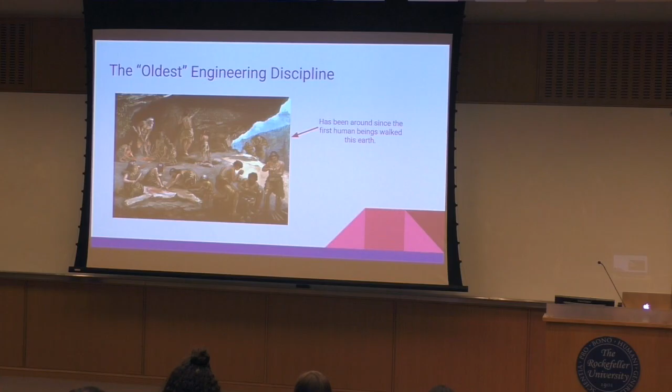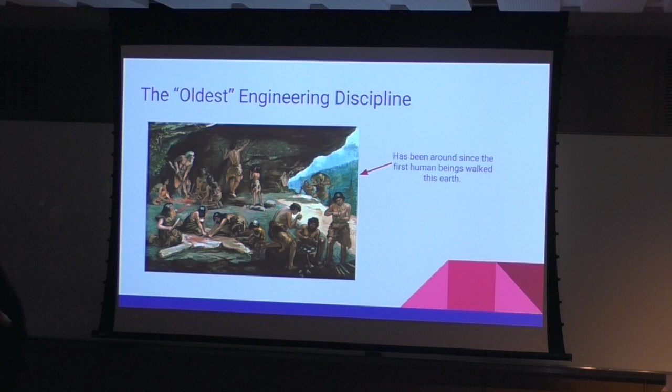Raise your hand if you've heard of civil engineering before. I think we got a little bit of us. So I'm going to go into the history behind what civil engineering is. Civil engineering is the oldest engineering discipline. It's been around since the first human beings walked the earth, since they first put up a stable structure or maybe pushed a log over a river - any man-made object that allows us to exist within the physical and built environment. Civil engineering is a discipline that deals with the design, construction, and maintenance of the physically and naturally built environment.

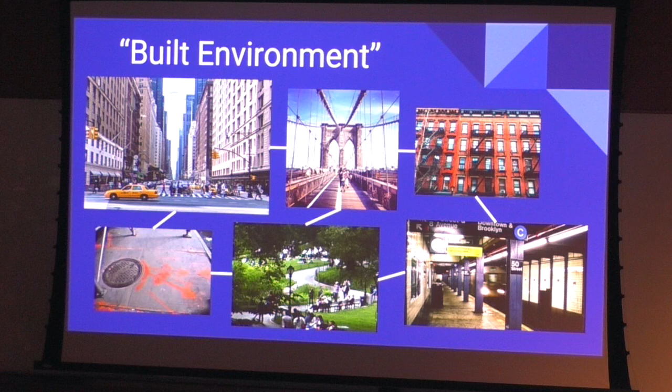And by built environment, I mean all of this - pretty much your buildings, your roads, your sidewalks, curbs, bridges, all of your underground utilities, the paths through the parks that we have, the subway stations. So you can basically call New York City one giant built environment. I'm going to go through some of the different types of civil engineering right now - there are different subtypes.

These are just some of them. But we've got structural engineering, which deals with buildings, bridges, tunnels, anything where you're looking at how to support the weight in this structure and make sure that it doesn't fall down.

Then you've got transportation engineering, which deals with the flow of vehicles and people. So that's like the signal controls within the subway system, or the traffic signal timing in the city to allow traffic to flow well.

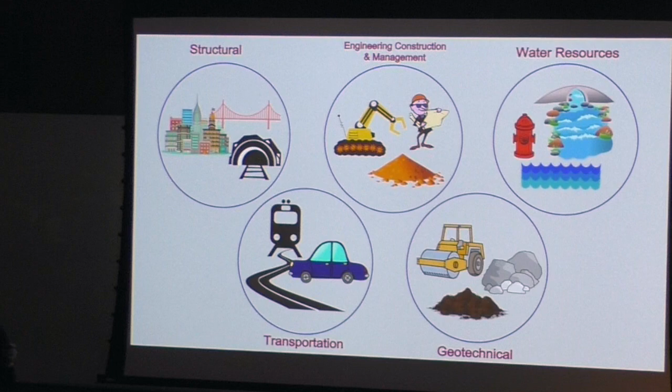That's all transportation. We have engineering, construction, and management, which is kind of what I do. This is taking the designs that people make and practically implementing that outside. I work directly with construction workers, I don't do the construction work, I just oversee what they're doing. That's the management side of it.

Then you've got geotechnical engineering, which is like your foundations - what soil do we have underneath what we're building? It's important because you could have soil that isn't good or has too much water infiltration, and you put a building on top of it and it sinks into the ground, kind of like the Leaning Tower of Pisa. That's kind of what happened with that. So geotechnical is all the materials below that provide a good solid foundation for your buildings or different structures.

And then you've got water resources - where's our water coming from? Where is the water that we're getting to cook or clean ourselves or different things like that? And then what are we putting out back into the environment - the wastewater, how we're treating that, and how that's going to be environmentally friendly. So these are all different subtypes of civil engineering, involved in infrastructure work within the city.

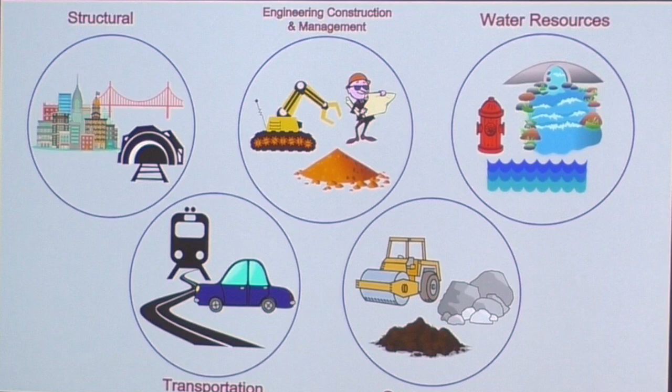So if you know how, when you're sick, you go to a doctor to get a diagnosis and a cure - I would consider civil engineers to be the doctors of infrastructure. If there's any issue with a building or a bridge or something's not functioning quite right, we go in, we diagnose what the issue is, and then we provide a cure for that.

So I'm going to go into the history of how the city was formed. The first settlers, the Dutch settlers, came to the island of Manhattan in 1609. They chose this location specifically for its proximity to the East River and mostly the Hudson River, because that went all the way north into the mainland and connected to valuable trading assets.

One of the largest changes, the most drastic, were actually the expanding borders of Lower Manhattan. This is the first known map we have of the city. They've got this fortified wall, which is where Wall Street was named after. So that's Wall Street, and this is like a military outpost - it was actually a fur trading post. Anything north of this is pretty much unoccupied land in the 1600s.

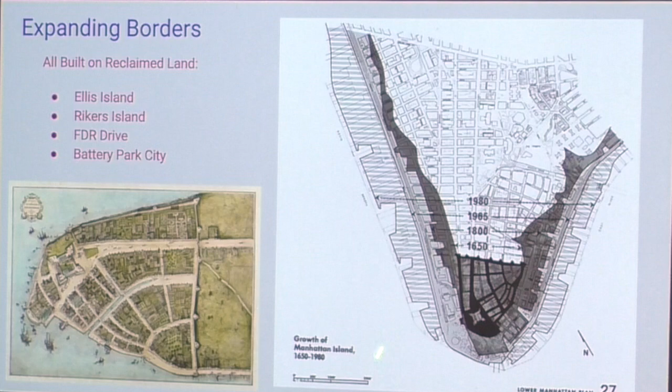And Battery Park City, they actually built that from all of the dirt that they excavated out from the World Trade Center site. They just excavated it, moved it down, and built Battery Park City. So this is one of the most drastic changes.

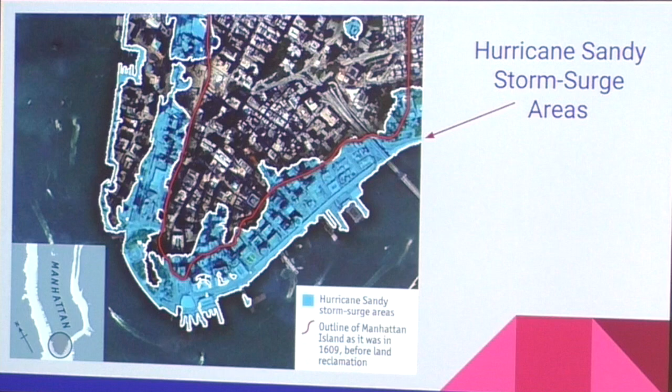I thought this was pretty interesting. The outline of Manhattan Island as it was in 1609 is this red line, and then when Hurricane Sandy came through, this is the storm surge area. You can kind of see how it goes pretty much up until that original outline of the island. So I'm thinking, if we hadn't reclaimed all of this land, would it have flooded as bad as it did? You can't really know, but it's interesting to think about.

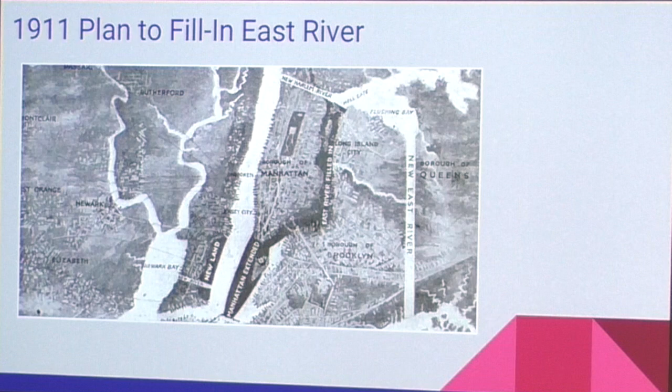At this point, they were expanding a lot in manufacturing jobs, which means they needed a lot more land space. They weren't building up, they were building out. But once manufacturing started going down in the early 1900s, they actually started building upward, because people could just work in office buildings and generate money through that. So they didn't need the extra land, and that's kind of why they scrapped this plan.

The original water sourcing on the island, they were all finite sources of water, like the water table below ground. They would use small streams, ponds, stuff like that. They had this thing called the Collect Pond, which is kind of in the Chinatown and Five Points area, that's where this was, and that's where a lot of people got their water at that point. Obviously they can't get it from the ocean because it's salt water.

One of the catalysts for this was actually the prevalence of fires in the 1800s. They wanted to develop a waterworks system, a comprehensive, reliable, clean drinking distribution system. They had a lot of fires happening because the population grew, you had a lot more wooden buildings close together, and the firefighters couldn't get the water to where they needed it to be. They didn't have a hydrant system or anything like that. I feel like we take that for granted, but they didn't have a system underground providing them with water, so they'd have to use bucket lines, stuff like that. So to prevent any further large fires, they wanted to set up this waterworks system.

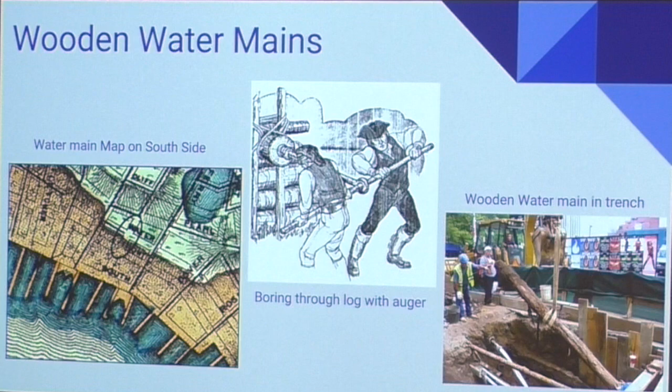There were some other flaws with this. So like the wooden water mains, this is one being removed from a trench. You can still find them once in a while in lower Manhattan, I think this is the South Street Seaport. One of the downsides was that they were susceptible to tree root infiltration, so trees would grow above them and the roots would go into the logs, but they would also freeze in the winter. It just wasn't a reliable source because they were still using the finite water sources from the Collect Pond and different areas like that.

But this drastically changed how people could live, the quality of people's lives at that time, because they were able to have consistent clean water sources. They had bathhouses open to the public. Disease was going down because they didn't have to use the polluted water anymore, stuff like that. So it was really beneficial to the city.

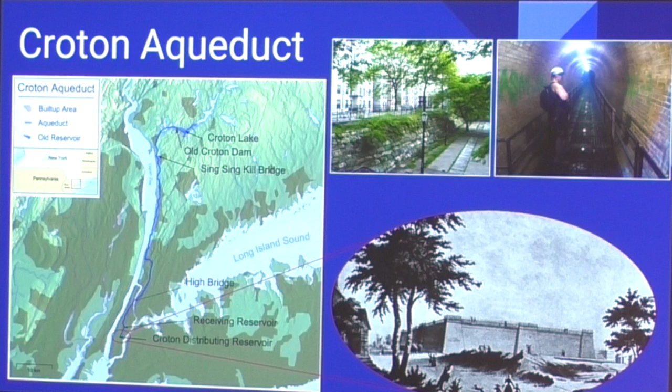But this is the first aqueduct system they set up. They rebuilt a newer, larger one in 1890, I believe. And then this is the current New York City water supply system. So this is the Croton watershed, that's kind of what I was talking about before. And then they've expanded all the way up here to the Catskill, Delaware watersheds.

So the New York City water system is considered kind of the gold standard of urban water supply systems in the world. We have some of the best water and the largest system ever made.

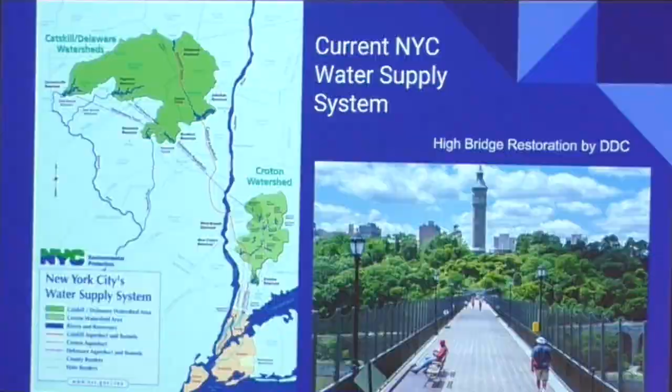Here's the High Bridge restoration by DDC. That was, where was that, over here? No, yeah, right there. Anyway, so the water comes from, they put in a few more aqueducts over here, comes all the way down. Again, this is all gravity flow. And it goes to what's called the Cat-Del UV plant, named after the Catskill, Delaware watersheds.

Here, because the water is unfiltered coming into this, they have to make sure they're getting all the contaminants out. They used to put a lot of chlorine into the water. They found out that will disinfect it, but it's also not great for people to ingest that much chlorine. So they found this technology in the late 90s where you could basically treat different toxins with UV light in the water, like cryptosporidium, which was one they were trying to deal with. Basically you treat it with UV light and that gets rid of it, so they can put less chlorine into the water. It actually saved them a lot of money doing this versus building a giant water filtration plant.

So they put a lot of money into this, but it has saved a lot over time.

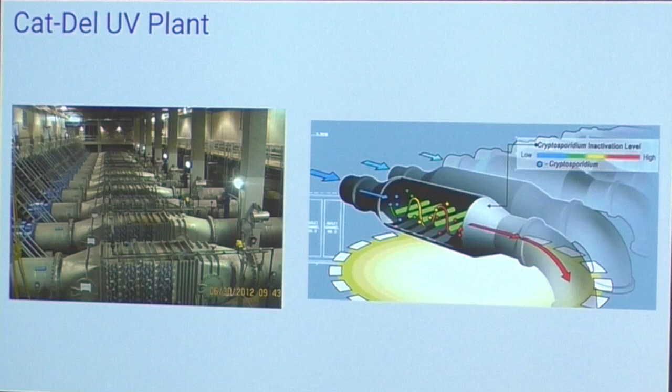After it goes to the Cat-Del UV plant, we're going to go down into these water tunnels. We've got 3 of them now. The first 2 were built in the early 1900s, and the third one was just opened in 2013. It had been under construction since the 1970s. That's a very long time.

And these are built, they're huge tunnels, as you can see. They're built really deep in the ground, probably like 800 feet down. And it's all gravity flow.

So it comes out of the Cat-Del UV plant, it goes into these tunnels, and the pressure of the water is so large that they have these shafts going up to the surface that it'll just shoot up these shafts, and then it'll go into this trunk water main system, which is like, they're probably 3 to 5 feet in diameter, larger pipes going throughout the city. And then you go into a distribution water main system.

So that would be stuff that we replace on a regular basis, like 1-foot ductile iron pipes. And those are going down every single street in the city. Usually you'll have like 2 lines on an avenue and just 1 on a regular street, and then you've got house connections going to each building from there.

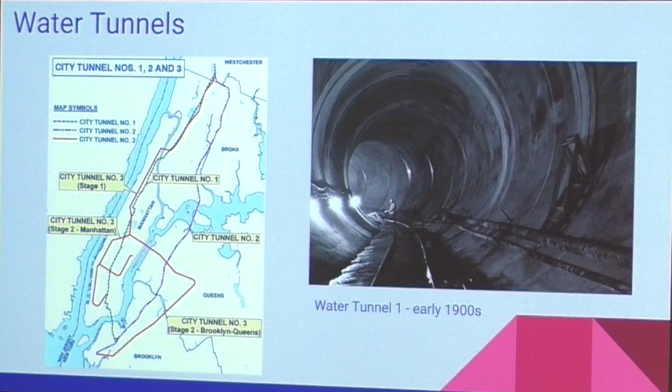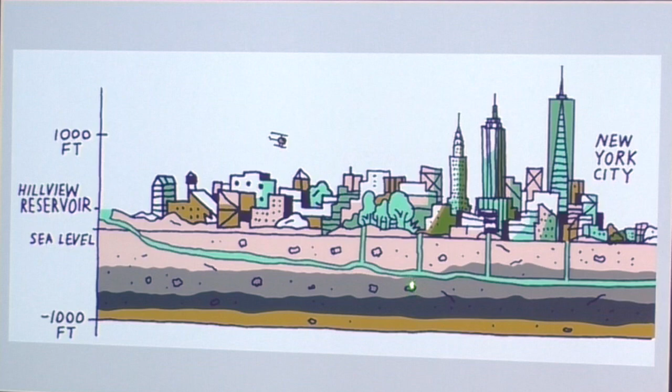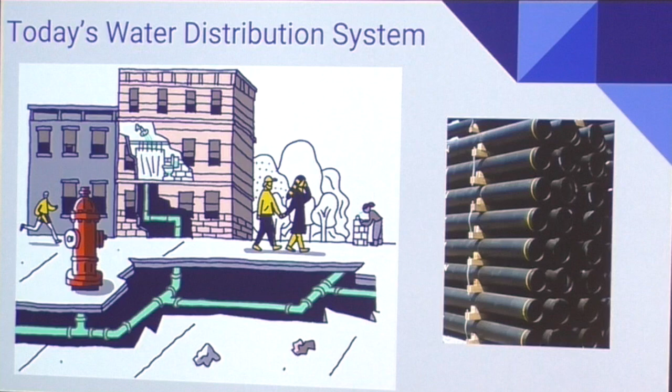The pipes they used to use, we've actually advanced our technology enough to the point where, well, they used to use cast iron, and they used lead joints or lead service lines and stuff like that. Lead obviously is toxic to people, so we don't want to use that. And cast iron gets really brittle over time, so they would break a lot. So we've been putting in these other pipes, ductile iron pipes, so hopefully that'll last a lot longer. That's a lot of what DDC does, though, is water distribution replacement.

I mentioned the sewers before, so this is when people stopped taking water from the existing water table, and it started rising again and flooding everyone's basements. So they set up this system of sewers. There's a few different types. I'm sure you've seen this.

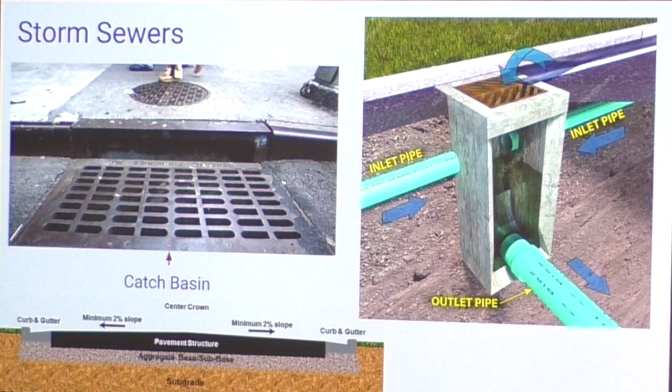That's purposefully done, obviously, because you don't want water pooling in the middle of your street. So they do this, and then it'll go into wherever the lowest point of the road is. It'll go into this catch basin, and then into an outlet pipe, into a larger system, and then into a wastewater treatment plant. So that's a storm sewer.

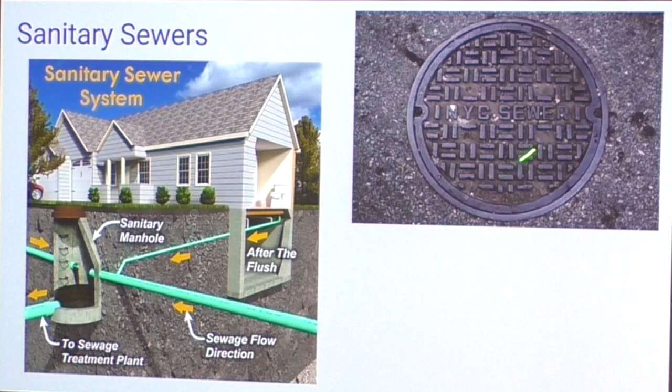Anyways, the systems here, they originally had all of that water running together. So they had your rainwater and then your wastewater from your house running through the same pipe. They figured out later that it was actually more convenient and efficient to separate them into separate lines. But the city built them so long ago that we just replace what's already in the ground because there's too much stuff running. I'll show you a picture later. It's so crowded whenever you try to dig into the ground. So we just replace what's existing, so they're combined right now.

In the rest of the country, because it was built a lot later, like where I'm from, the sewers are all separated, because they had come up with that technology at that point.

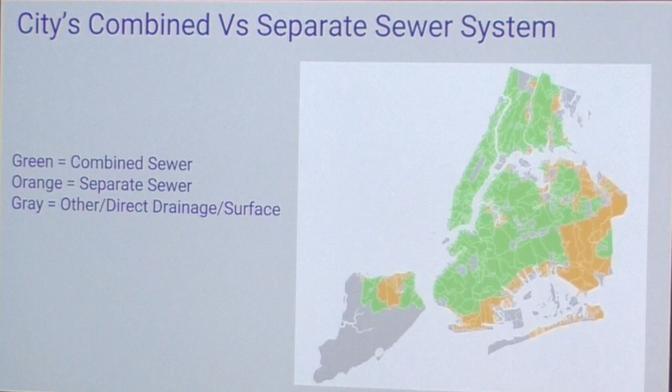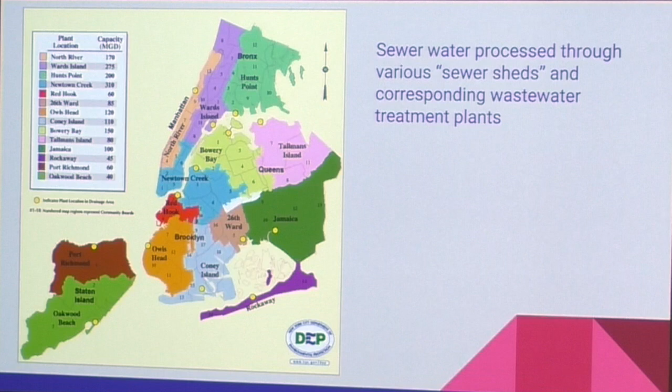So then the sewer water is processed through the various sewer sheds and to the corresponding wastewater treatment plants. You can kind of find where you live and what treatment plant is treating your water. I think the Newtown Creek and Greenpoint plant actually services the most in this area. They'll take the water in, run it through a series of filters that break down the waste, get the clean water out again, and release that into the oceans, streams, and so on. That's kind of how the sewer system works.

Waste reduction and sanitation—we know about this because if you go out in the summer, it smells awful, right? All the garbage is on the curb.

The original systems, I think, were much worse from what I hear. People would throw garbage out their windows onto the street, or dump it in the harbor. I actually found that they had a system of trash-eating pigs—a bunch of pigs that would run around the city eating the garbage. They didn't have as many plastics back then, so the pigs could eat most of it. Eventually they decided it was unsanitary and got the pigs out of the city, then hired a bunch of people instead.

They called them the White Wings. They were all dressed in white because they wanted to emphasize cleanliness and sanitation, and they were kind of the street sweepers, getting all the trash out of the streets. That was the first comprehensive sanitation system in the city.

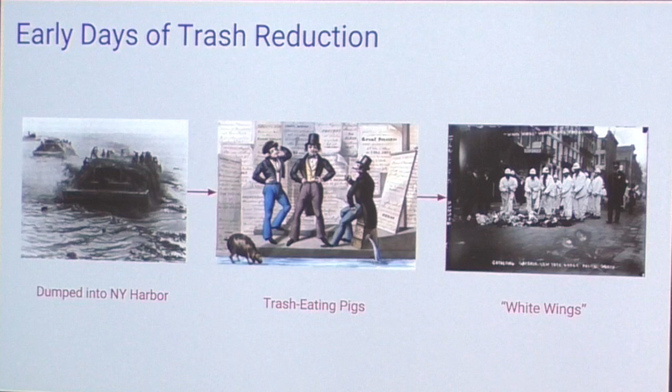The current system, we're still kind of doing that—just picking up trash off the curb. The issue is we don't have anywhere to put any of this because there are no alleyways built into the city. I always think about how Chicago had the Great Fire, and it's not a good thing, but they got a second chance to redesign their city and put in alleyways and develop a better trash system. New York never got that chance. So I think whoever figures out how to deal with this will be a very rich person.

But the Roosevelt Island trash system, which was built a lot more recently, is actually kind of a trash conveyor belt. In all the buildings, people can put their trash into a chute, it goes down onto this conveyor belt, and gets whisked out underneath the island. I thought that was kind of cool.

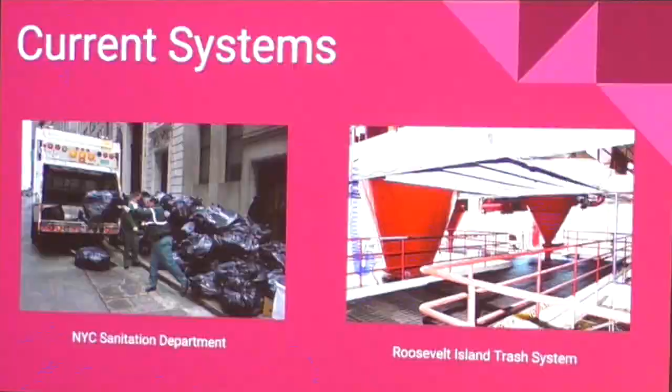Transportation—transportation growth, so how the city grew in terms of the options for transportation they had. Because early on, obviously, it was just walking, riding animals, or being pulled in a cart by an animal.

In the Commissioner's Plan of 1811, they had this idea for a huge grid, which New York is pretty much known for today. But they were having issues with people trying to claim land plots—people fighting over the price and the size. They didn't have any way to regulate how people were buying plots of land or to make sure the streets ran in straight lines. So they decided to set up this whole system of avenues and streets all the way up the island, which is a bold idea since they only had 100,000 people living there at the time.

To anticipate undergoing construction and having who knows how many people fill up the rest of this island in the future was a pretty bold idea, but I guess that's what facilitated how the city has grown from that point on.

So they set up this grid, and they also acknowledged Broadway, which was the original Indian trail going all the way up the island of Manhattan—that's why it's diagonal, running through the middle of the city. And then, of course, Central Park is in here, so there were some changes that had to be made eventually that they added in. But this was kind of the original design.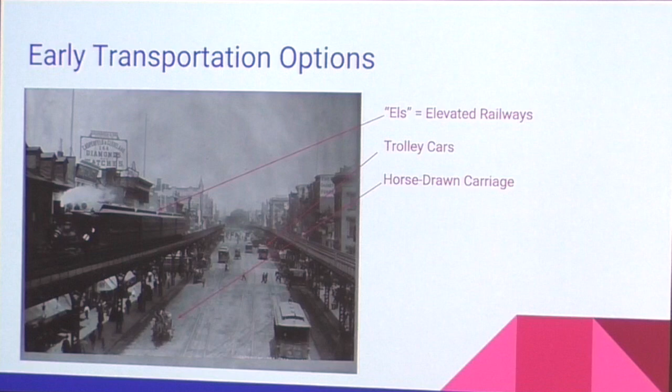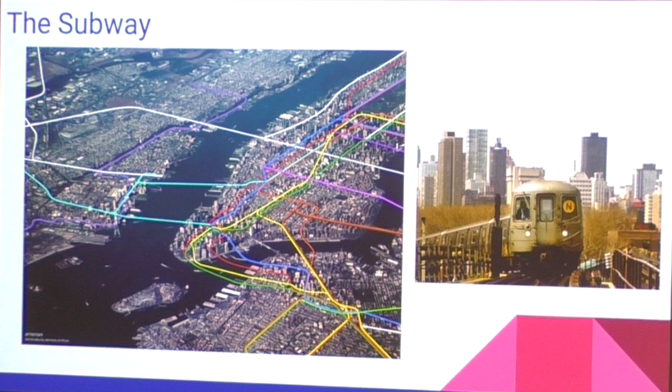Then as the population grew more and more, they needed a larger system that could handle the volume of people that wanted to travel on it, so they decided to build the subway. They didn't have anywhere to go other than below ground, because they already had above-ground systems on the streets.

They used the cut and cover method, which is basically where you dig a hole in the street like a trench, solidify the sides, and put a support above so people can drive or walk on top of it. Then you can work below there. This also confines them to building in the street grid itself, because you can't do the cut and cover method when you have a building there.

They could have done a deep boring method, but they didn't have the technology at that point. That's how they built the Second Avenue subway, using a giant boring machine really deep in the ground. At that point there's no other room, there's utilities and other things over there, so that's why they did it that way for the Second Avenue. But when they first built the subway, they didn't have that technology.

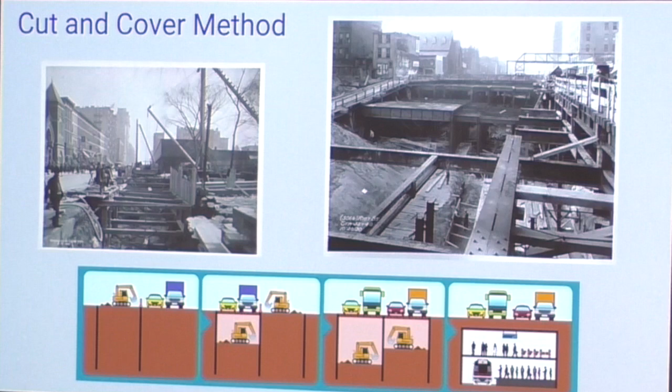They also built underwater tunnels, digging down until they got to the muddy, silty material just below the river. Then they would dig into that and lay all the bricks around it to support it, and to keep the water out, they pumped in pressurized air.

What they found out, though, is people would come down with something called the bends, which is diver's sickness, because when you have this pressurized air inside of you and then go up to the surface too quickly, you get air bubbles in you. It creates an imbalance and people get really sick from it. They didn't know this at the time, so that's how they were building everything.

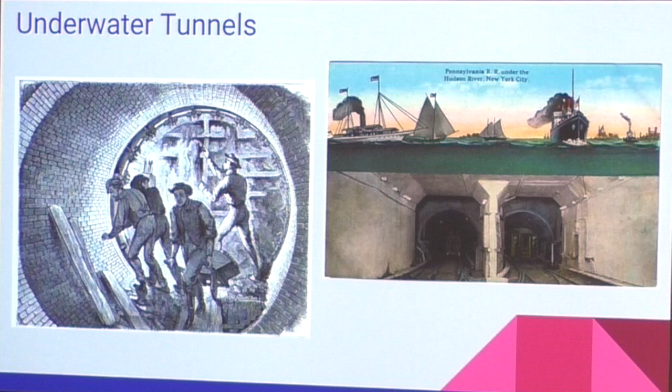They would also dig all the way down to the bedrock way below the bottom of the river, and then try to reach each other in the middle, which is kind of a gamble because you have to be very, very accurate with this. I always think that's interesting, and people have made mistakes before, they've missed, and that's difficult to correct. So that they were able to do that at that point is kind of a big deal, I think.

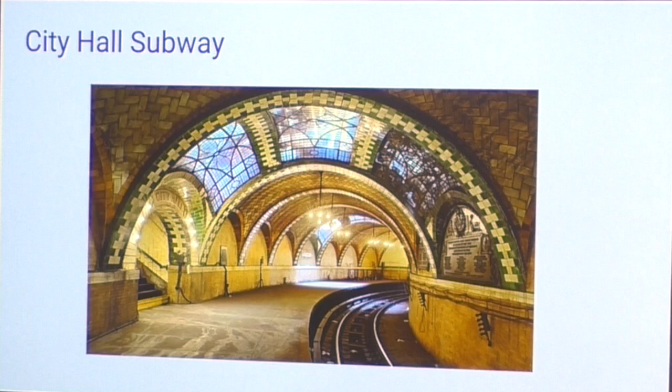They also had some decorative subways, like this City Hall subway, which I haven't been to yet, I'm trying to figure out how to go there. I guess you have to ride to the end of one of the subways, but they put a lot of artwork into this in the old days, which I thought was cool.

Another thing you can look at is those little round glass pieces in Lower Manhattan, right? These are actually little lights for people to work under. Underneath all of those you've got building vaults, and people used to work down there. I don't know if they still do, I'm thinking not, but that's how some of this was set up.

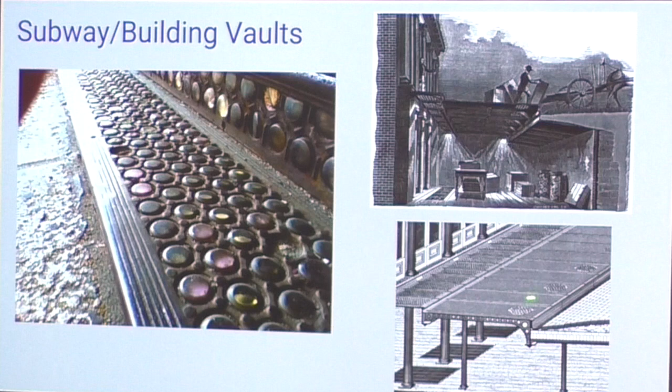And like this, I was working at Astor Place. If you look at the material, you can see granite slabs and stuff like that. These are all building vaults or subway vaults. We weren't allowed to dig that up, because if we pull that off, that's literally the roof of this underground vault area. So we have to build around that because it's a historic area.

Sometimes they would build a station so high up that the top of it was the sidewalk, and that makes it difficult now to replace.

Something practical: you've got your bridges, which really revolutionized how people were able to get around. It revolutionized the social culture in the city too, because if people are living in Brooklyn, it's hard to get over to Manhattan in a quick way. Building a bridge allowed people to live in an outer borough and travel over to work in Manhattan, then come back. I thought that was interesting how this connected all the boroughs and created the city system as it is today.

They built the foundation parts with things called caissons, which are basically like if you took a hollow box, took out the bottom, and forced it into the ground, creating a shaft where you can pump the water out below it and dig out, and people are allowed to work down there. That's what that is. They would also pump pressurized air into this, so people would get the bends from building this. That's the Brooklyn Bridge.

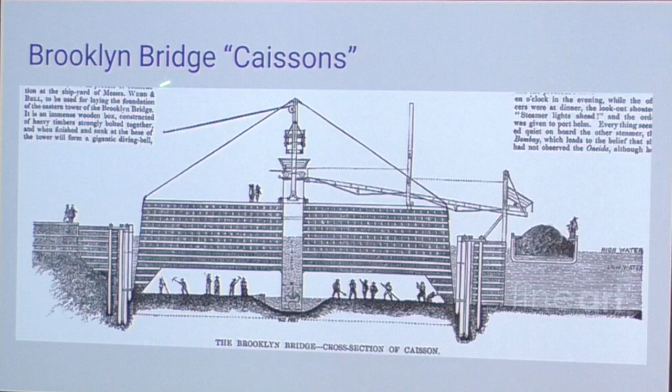They built most of them this way at that point. Then you've got your power sources and your utilities.

Quickly going through this: you've got steam power, which is old—you heat up water and the steam rises, and you can use that for heating and cooling systems. It regulates room humidity and is used for disinfectants. If you've ever seen these steam towers, that's just releasing excess steam in a safe way. You've got gas used for heating, cooking, electricity generation. You've got electricity for lights, chargers for devices, small appliances, and then telephone and internet.

Steam and gas run through large pipes underground. Electricity and telephone, when that was first done, they used to put up these huge poles. You can imagine what the city would look like if they had left this here—I'm sure it would have just gotten worse. So we're lucky they decided to put them all below ground at a certain point. In a lot of the outer boroughs they aren't all below ground, but in Manhattan they decided to do that.

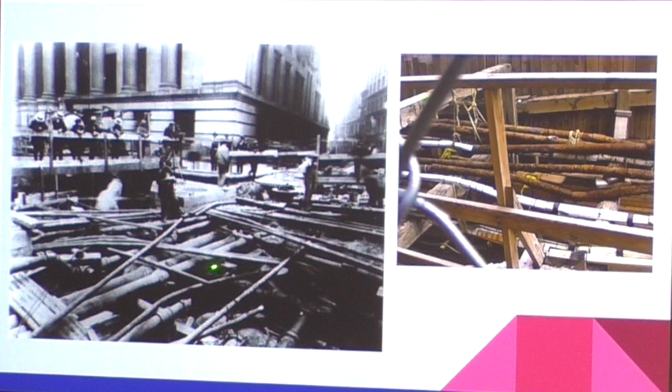So now you get this, basically—you dig up the road and it all looks like spaghetti, everything intercrossing. You never know what you're going to find when you dig down there, because a lot of the records have been lost over the years, so you never quite know what you'll find. This is one of my pictures from one of the sites we were working on.

Quickly on the evolution of skyscrapers in the city: the skyscraper didn't really come around until the elevator was invented. Because if you think about it, no one wants to walk up 10 flights of stairs to get to an office, right? So the richest tenants would always want the ground floor suite because people would go there—they wouldn't go up all these steps. Once the elevator was invented, though, everyone wanted the penthouse suite because of the views, and you were able to get up and down fairly easily. That really changed the skyline of Manhattan.

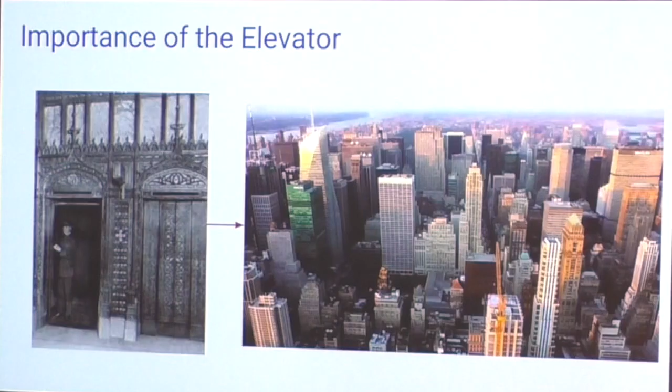I'm going to go into what I do on a daily basis now. I do infrastructure construction. This is one of the pictures from our site—I think we were laying water main valve. That's me, as an inspector. I don't wear this on a regular basis.

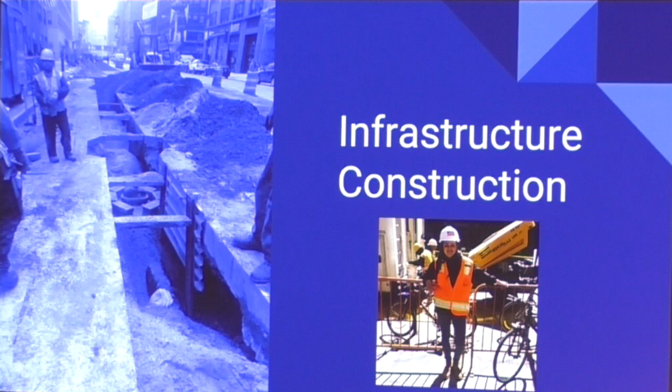What I do on a regular basis is everything roadway and below. We do sidewalks, curbs, pedestrian ramps, roadway restoration, replace water main pipe, sewer pipe. We work around utilities, like I mentioned before, like steam and electricity—all those lines that are intercrossing there. We deal with that.

Everyone will ask me, can you fix the subway? And I say, well, you know, because they figure, oh, you work next to it, you must be able to—kind of in a joking way. And I'm like, no, they're very protective over their stations. They don't let you touch it at all. If you scratch one of them, they're like, replace it, you know. So we're really careful around that.

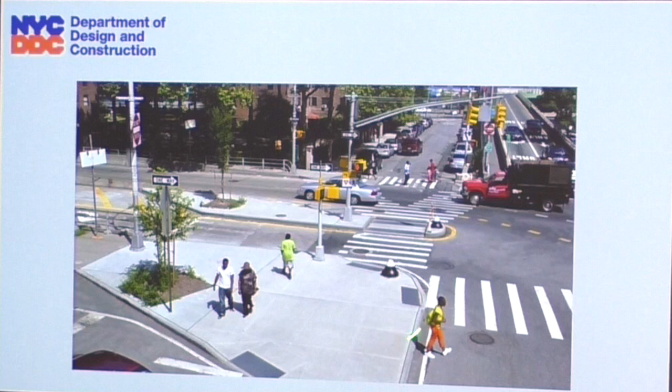Well, we do all of this stuff. We'll do plaza features. I worked at Astor Place, so this is near NYU—I don't know if you've been over here, but I came on near the end of it, and we put the cube back.

I was there for that, so we get to work with public art. We do specialty sidewalk work. In historic areas, it's tinted a darker color, and you might have exposed aggregate with it. I bet you didn't know that concrete could be fancy, but it can.

We work with landscape architects to create bench systems. These are granite benches or steps. We've got planting areas, all these different features. It's interesting because you really get to create the landscape and what people will be using on a daily basis.

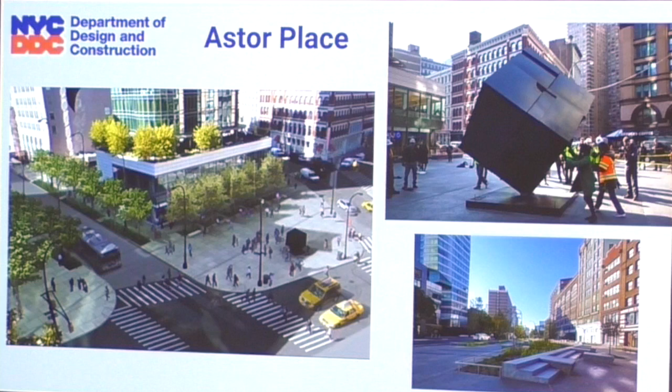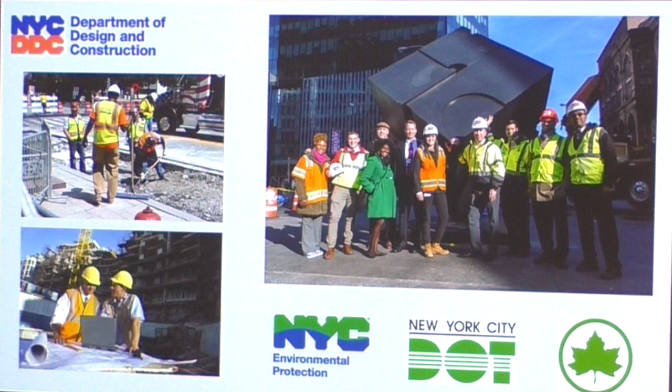You get to work with all types of people. So this is us in front of the cube. We work with other city departments: the Department of Environmental Protection, the DOT, the Parks Department. We work with construction workers, architects, landscape architects, and sometimes archaeologists, because if we're digging down in historic areas, we might find something, since people used to throw their trash into the ground. You never know what you're going to find down there. We work with community boards, the mayor's office, all different types of people. So it's pretty interesting. This is some of the stuff we found.

This is an old pipe from the 1860s, I think. This hadn't been touched in probably 150 years. That sand wasn't in there when we took it out, I don't know where that came from. This is all iron deposits, so that's what we're taking out of the ground. So when everyone gets mad that we're replacing their water main, I say, this is what you were drinking out of before, so we're putting a new one in.

Found this old shovel from, I think, the 1850s. It's got a wooden handle, so that was kind of cool, pretty intact. And I actually know the person running this project near the Astor Place site—they found these old burial vaults near Washington Square Park, because it used to be a potter's field. They found all these bodies in it, and they had to call the archaeologists over and stop the project for a while. It was kind of an interesting time.

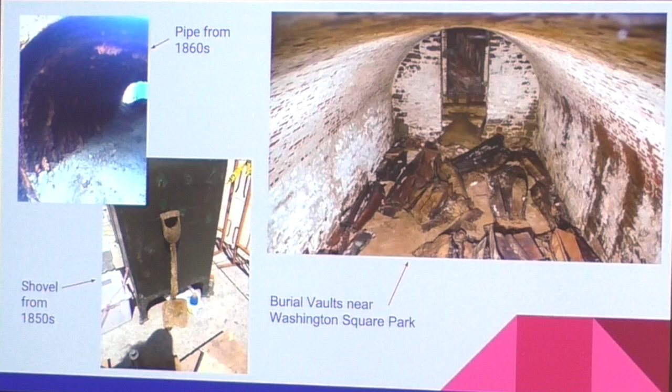Our old commissioner once said, as we build the future of New York, we rediscover the past. I like that statement. So as we're digging up, we really get to understand how things were done in the past and how that relates to what we're doing today. I'm going to show this video here in a second. I don't know how to start this.

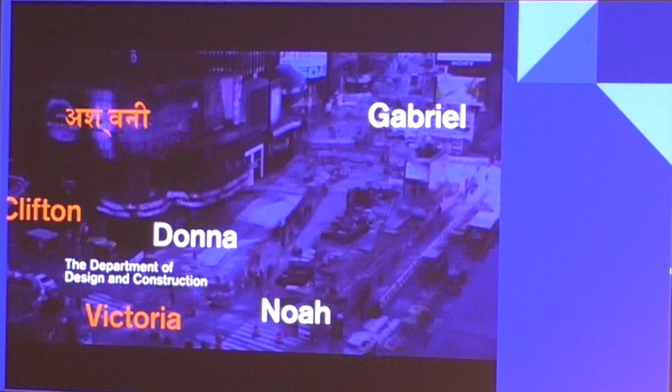My name is Audrey. My name is Abdiel. Zia. Valerie. Victoria. Ashwani. Helena. Clifton. Gabriel. Donna. Noah. My name is Barbara. Blake. Safi. Dalila. Hi, and I'm Charlie K.

I live in Manhattan. I live in Harlem, New York. Woodside, Queens. About two miles from us. In the Bronx. I live in Brooklyn.

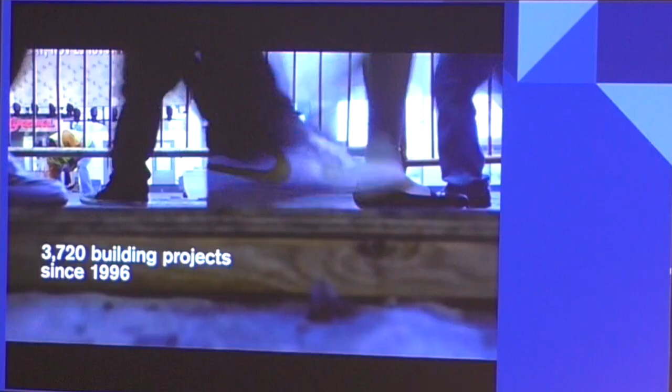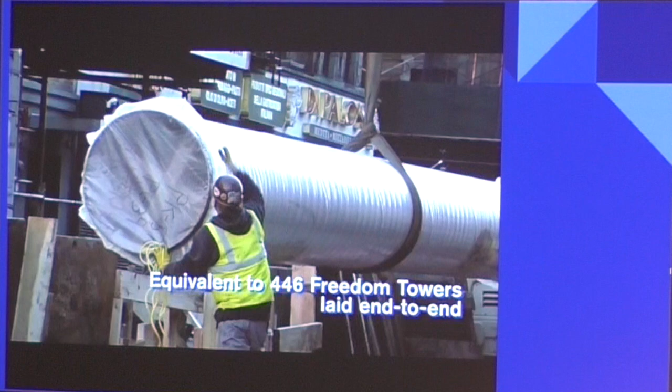I live in Staten Island, and I take the ferry every day. I am building for the people of New York City. I am building for a more efficient and effective New York City. I am building for the future infrastructure of New York City. I'm building to ensure that clean water continues to be delivered to all New Yorkers. I'm building for the safety of New Yorkers. I'm building for libraries, I'm building for literacy. This is a haven for them, they can actually sit in a safe environment and work and learn. For a city that takes care of its people to improve their quality of life. We work to improve public health through the design of our buildings. I am building for a better urban environment. I'm building to preserve, educate, and inspire.

One thing? There isn't one thing. All the employees here are professional and dedicated to their work. I'm building for making the city more beautiful. I'm building for quality and longevity. We get to try new technologies which will improve the life and quality of our projects. I'm building a greener city to preserve our resources for the next generation. Providing a building that meets the needs of the occupants at equitable cost to the taxpayers. For a system of preventative maintenance, I'm building for the future of all New Yorkers. I'm building to ensure communities are more well-informed. I'm building for the prosperity of small businesses in the city. I'm building for equality, and I'm building for inclusion. I'm building for a city that makes people love their city and makes their city love them. I'm building for the greatest city in the world.